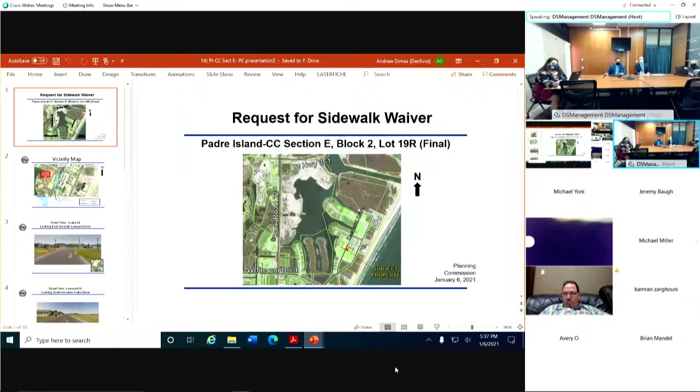As you can see, the general location of the area, the subject property, is at the corner of Leeward and Aruba on North Padre Island.

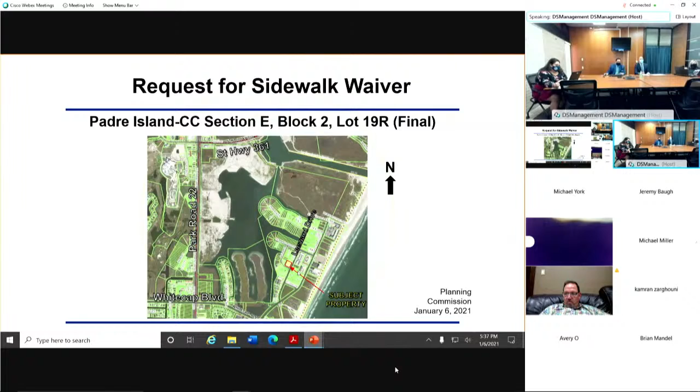Here is a closer view of the subject property. As you know, this area is common for planned unit developments and townhouse developments. The subject property is on the left-hand side of the screen.

The request, of course, is to receive an exemption from constructing a sidewalk. Leeward Drive is a collector street and does have the ability to have bike lanes.

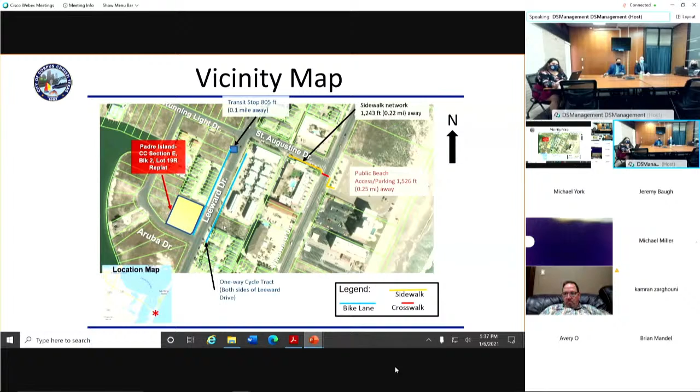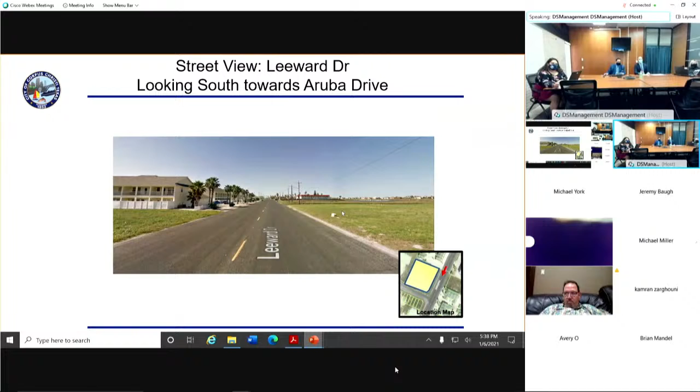Here's a view of the subject property from Aruba. So your subject property would be on your left-hand side, Leeward being the cross street. And here is a view from Leeward. The subject property is on the right-hand side. Another view looking in the opposite direction along Leeward.

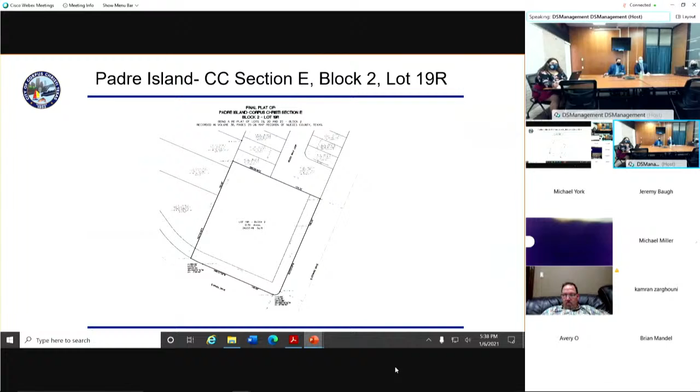Here's a view of the plat showing essentially the breakdown between the townhouse development to the north. The project to the left-hand side has also recently been replatted and is also a multifamily development.

So there are several factors in favor of supporting the sidewalk waiver. First and foremost, the common trend that we hear is that there are no sidewalks on the island, nor Mustang nor Padre Island have sidewalks constructed.

However, items working against the request: this is a corner lot, which is where networks start. It is adjacent to several amenities, meaning it is a high tourist traffic area. You have walking paths and bike paths to the beach, as well as how it trails down to Beach Access Road 2A. So this is a busy area, which would make sense to have safe pedestrian travel as they're traversing a collector road, which is typically indicative of higher speed traffic. So having the walking facility would be the safest thing.

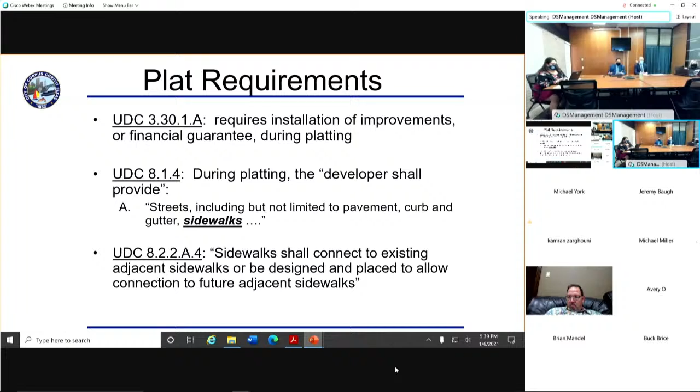As you can see, there are plat requirements, which is more of the legalese behind why we require exemptions that have to go forward, or in this case waivers. The process is that the application goes through the Planning Commission, and Planning Commission must make a determination of either approving with conditions or denying the request for the sidewalk waiver.

Now, lastly, based on the information presented, staff is recommending denial, as we feel that the sidewalk network would not only begin here, but would start the trend of providing that safe facility. If there are any questions, I'd be more than happy to address them.

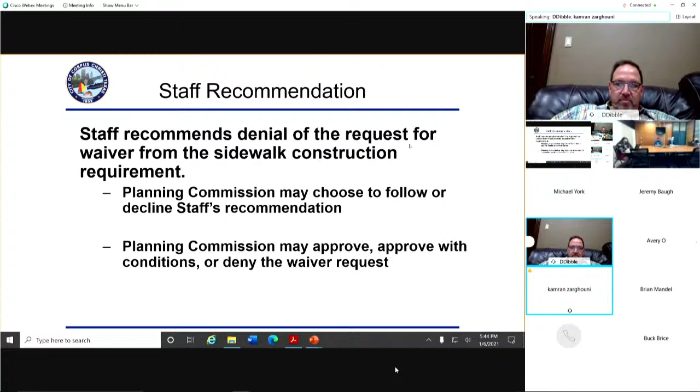Do we have a second? Is there a second? If there's not a second, we will need another motion. All right, this is Commissioner Miller. I have a question.

Obviously the applicant, one of his final comments was that he's afraid that the improvements will be damaged during construction and that he will need some sort of safe pedestrian pathway during construction.

I think we've approved before to defer the public improvements at the time of building permit. Is that something we could do here, Andrew? Yes sir, that's absolutely correct. We do have a deferment agreement process through a letter of credit. There's times also that we've even deferred to site plan stage. So it's not an uncommon practice, because obviously it wouldn't make sense to install a sidewalk when you're going to have large, heavy commercial traffic or construction vehicles come through and damage it. So we do absolutely have the process available to push that further down the road.

Okay, can you help me word a motion? Well, right now we have a motion on the floor. If it fails to achieve a second, then the motion dies. And so at this time, is there a second for Vice Chairman Dibble's motion? Just point of order, the motion was to approve the waiver. That is correct. Okay, seeing no second, we will remove that motion and entertain another motion.

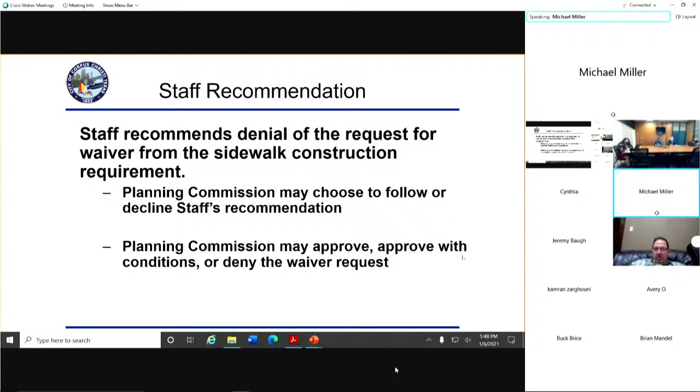Yes, this is Commissioner Miller. I move to deny the request for waiver from sidewalk construction requirement at this time. Do we have a second? I second. All in favor? Aye, aye, aye. All opposed? Vice Chairman Dibble opposes. Thank you, Dan. Motion passes. On to item D.

Number 15, urban transportation.

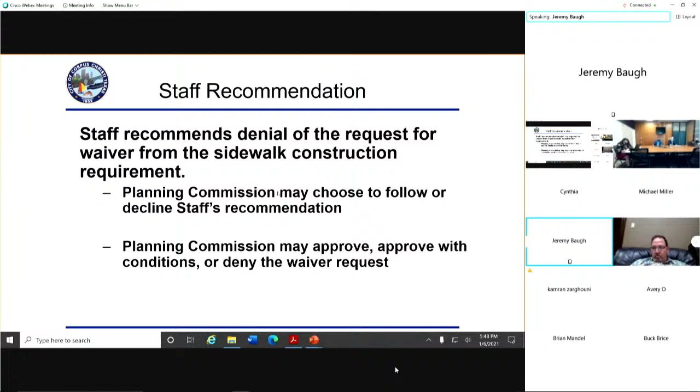All right, this is Avery Oltmans. Can you guys confirm? I hate these headphones. Can you guys hear me okay? Yes sir, we can hear you just fine. Excellent, excellent.

I'm going to have some help on the other end of the slideshow. So without further ado, as the title implies, this is a UTP amendment to propose the deletion of a segment of what's being called Wildcat Drive, from County Road 52 North to an unnamed east-to-west collector roadway. Please proceed to the next slide.

Here is a general site area plan showing the subject road. If you will focus on what is pointed out as Wildcat Drive, this is an unconstructed road at this time, simply farm ground. We're terming it Wildcat Drive because as you proceed north, that road would connect with the main egress-ingress of the high school, just to the north of Northwest Boulevard, that road being called Wildcat Drive. So that is the assumption there.

And then, of course, the unnamed road is the C1 that runs east-west and passes along the north boundary of the subject area, the subject area being that portion at the north and west corner of County Road 52 and I-69.

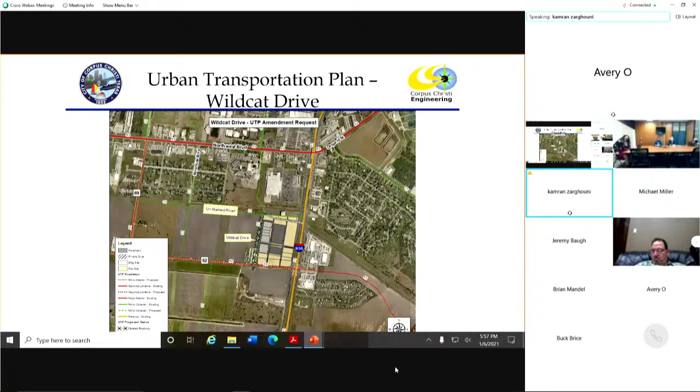All right, lastly, if I can have the next slide, thank you. One more, sorry, one more backwards. There you go, it's the one with all the background information, all of the text. Lastly, the subject property will provide access and connectivity through the internal driveway system.

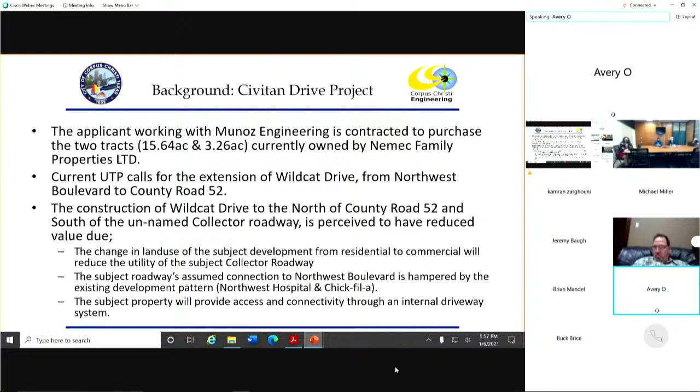If you could back up one slide, please. Perfect. So again, as I touched on already, the all in all, what the development is asking to give in replacement for the deleted UTP road segment are the two north-south internal roadways. These are going to be roadways internal to the development and part of the development, i.e. not part of the city network and not part of the city maintenance system.

And then lastly, on the back side of the development, there will be a road intended to be constructed in a location very near to where Wildcat Drive is prescribed. But that roadway is intended to act as a private drive. It will provide access to loading bays behind the future commercial buildings to be constructed, but also will be available to the public, if someone wanted to cut through in that area, similar to the way that Moore Plaza is facilitated in the areas behind PetSmart and Target and the rest.

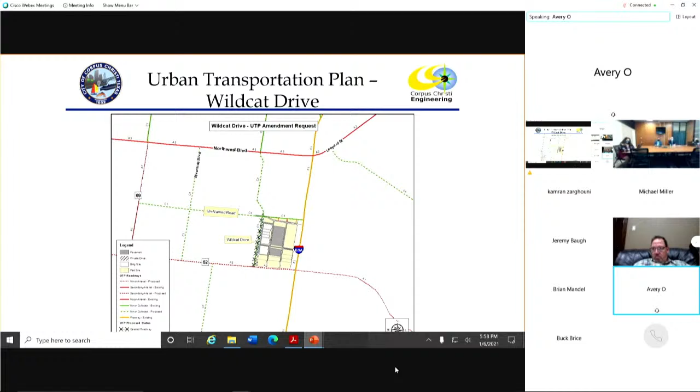So if you would please go to the last slide. Staff recommends approval of this deletion, and we would await any questions. At this time, does the Planning Commission have any questions for staff? Seeing none, I will open the public hearing for item 15.

Are there any comments? All right, we got one viewer on. Staff, are we waiting for comments from the public? The planning department at this point has not received any comments on this. At this time, I will close the public hearing portion of it and entertain a motion.

Do I hear a motion for item 15? Commissioner Miller: I move that we approve as per staff's recommendation. Do we have a second? Michael York: I'll second that. All in favor? Aye. Opposed? Motion passes.

Thank you. On to director's report. This is Al Raymond, Director of Development Services, and Nina Nixon-Mendez has something to share with the commission about our historical preservation plan. Good evening, Chairman, Commissioners.